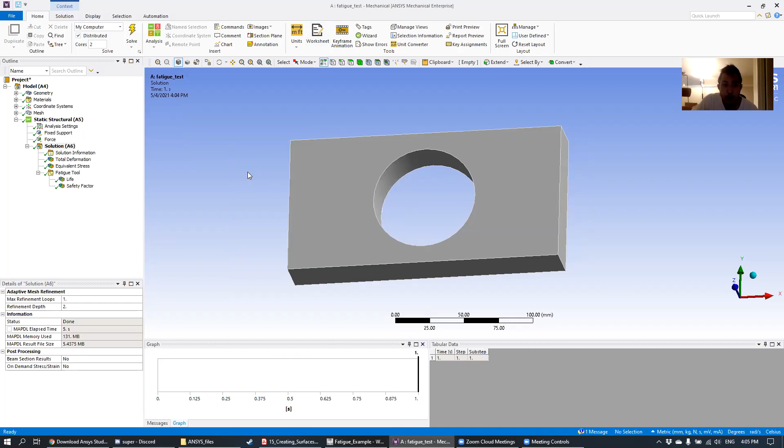To set up the fatigue analysis, we basically set up the same thing as a typical static structural analysis. The only thing we add is this fatigue tool. Just to remind you, we got this fatigue tool by right-clicking on Solution, A6 — that's typically where we'd insert things like total deformation, equivalent stress, and so on. But another thing you can insert here is this fatigue tool, and that'll give you information on how many loading cycles your part can withstand before it dies to fatigue.

I think last time we were looking at this screen right here. If you left-click fatigue tool, you'll be able to control how the loading goes and what kind of mean stress correction theory you can apply.

For the loading, you can switch it — the two main ones are fully reversed, where it'll apply your loads completely forward in one direction, then reverse it and apply the load in the other direction, cycling through that over and over again.

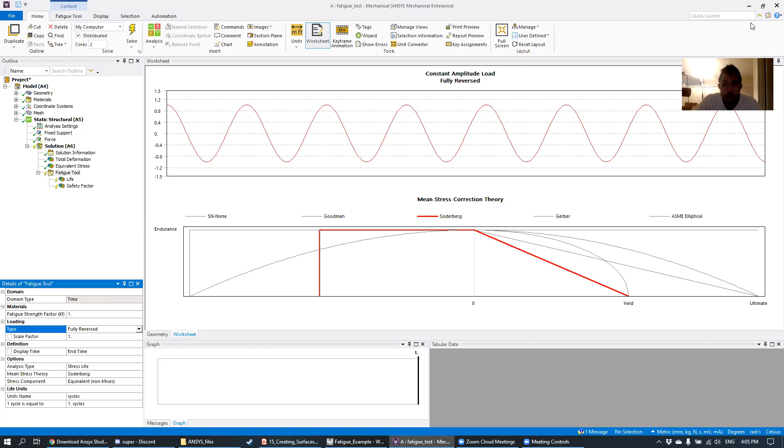Another way you can apply this is zero-based, where your load will go from full blast down to zero, then back up to full blast down to zero, oscillating up and down like that. Depending on the loading situation for your part, you can choose whichever one makes the most sense.

The other thing you have to select is a mean stress theory. Usually you'd want a mean stress theory that slopes downward like this — this one is the Soderberg theory. This tells you that the yield strength of the material will decrease over time.

Again, this isn't something I'm particularly familiar with, so I'm not going to pretend I know what these different models are. If you have a mean stress theory you've learned in another class, like strength of materials, definitely apply that here. It's been a long time since I've taken that class, so I'm just choosing the one recommended to me from reading some stuff online and the documentation — you guys are probably a lot more knowledgeable than me on this.

After you pick the loading style and the mean stress theory, you can go ahead and run the results to get these two main results here. Let me go ahead and solve this one more time.

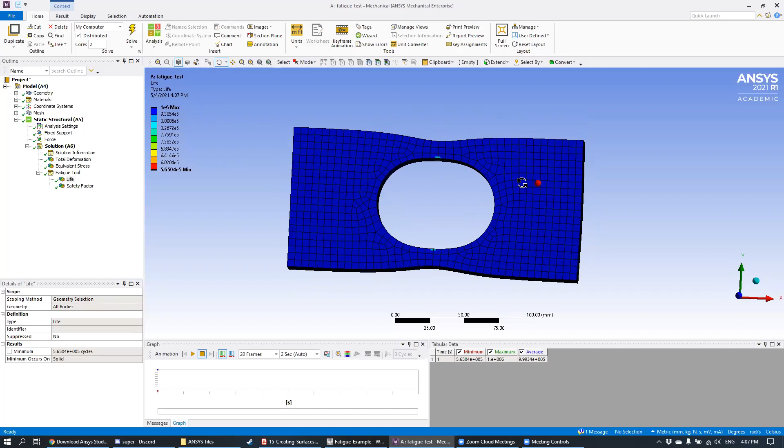Okay, so the first result we can look at here is called life. Life tells you how many loading cycles your part can withstand before it starts to become in danger of fatigue failure. What you'd like to see is most of your part be a blue color, because blue is typically a good color in Ansys — it tells you it's either low stress or it can take a lot of punishment.

For the majority of this part, we have the maximum allowable loading cycles, which is 1,000,000. We're limited to 1,000,000 because that's the maximum of the SN curve we saw last time — I think this material is structural steel, and for structural steel we only have data up to 1,000,000 loading cycles. This isn't saying the part will fail after 1,000,000 cycles, just that it should last at least that long. If you want to see how many more cycles it can withstand, you'd need to input more data into the material properties, like we showed last time.

But let's look at the other end of the spectrum. In red, you can see a value of about 565,040. Those are occurring at these apexes here on the hole. This tells you that after you reach about 565,000 cycles, those parts of your model will be in danger of fatigue failure. So if you repeat this loading forward and back 565,000 times, your part is going to fail first over here, highlighted in red, yellow and green.

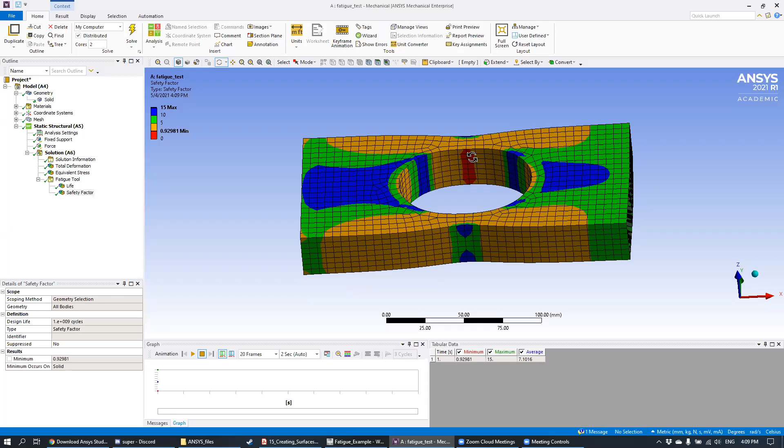Another thing you can find here is the safety factor. The safety factor is a measure of how well this part will hold up as a function of time. You can see the minimum here is 0.92981, which tells you Ansys thinks the safety factor for these red areas is really low, because they're going to fatigue and break at a relatively fast time compared to the other parts.

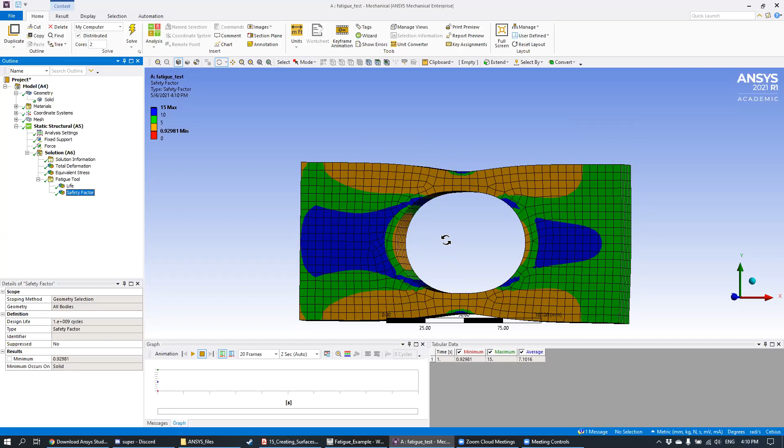Even though the other parts of the plate didn't fail, at least not in the life calculation, Ansys is giving you other areas you should maybe be concerned about in case of future fatigue failure. The maximum safety factor here is blue, and those blue areas are good. But in the areas that are orange, green, or red, those are relatively dangerous areas where you might want to think about redesigning to make it stronger.

So this was an overview of the fatigue life tools within Ansys. Remember, these are only an approximation — it's not like Ansys is actually simulating 1,000,000 cycles of loading. It's using finite elements as well as some theory about fatigue to produce these approximations. In real life, your results may be a little different than this. So don't treat this fatigue tool as gospel, and don't say you know for sure this part is going to last for exactly 565,040 cycles before it breaks.

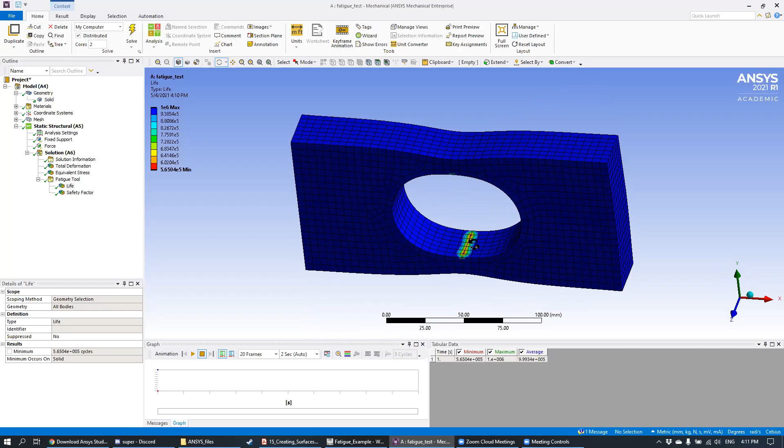Think of this tool more as a guideline to help you say, okay, I can see that this area of my model is more vulnerable than the others, so let me try to beef up this design to make it a bit better. Because it's such an approximation, I'd take these results as just a guideline to help you design your part better, but nothing too exact — there's nothing super exact about this.

Okay, so any questions on this fatigue tool before we move on?

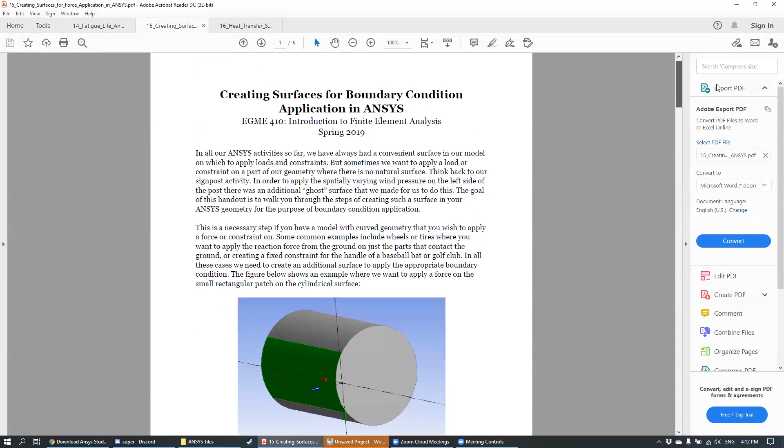This is a handout that's been posted onto Canvas, so it's available for you guys to look at. What I mean by this example is we want to create situations that look like this.

Because normally, if you have a cylindrical part like this and you try to select the surface of that part, you're going to select the entire exterior surface of the cylinder.

Which is fine for a lot of cases, but there might be some instances where you only want to apply a boundary condition on just a small area of whatever part you have.

I chose a cylinder here because this is the most common place where you would want to use this, because if you have some kind of rounded geometry and you want to apply a boundary condition on just a small part of it, right now you're not able to do that within Ansys, because if you try to select the surface, it would select the whole thing.

One example that uses this is, let's say that you have some kind of wheeled object. I know several of you are doing skateboards or longboards, or some of you are doing cars or trucks or things like that.

If you wanted to apply a boundary condition on the bottom of the wheel, right now you're not able to do it, because if you try to select the cylindrical wheel, you just select the whole thing.

But what would be more realistic is if you could only select just a small portion of it, so you can say this is the area where my object is resting on the ground, and that's where I want to apply my boundary condition.

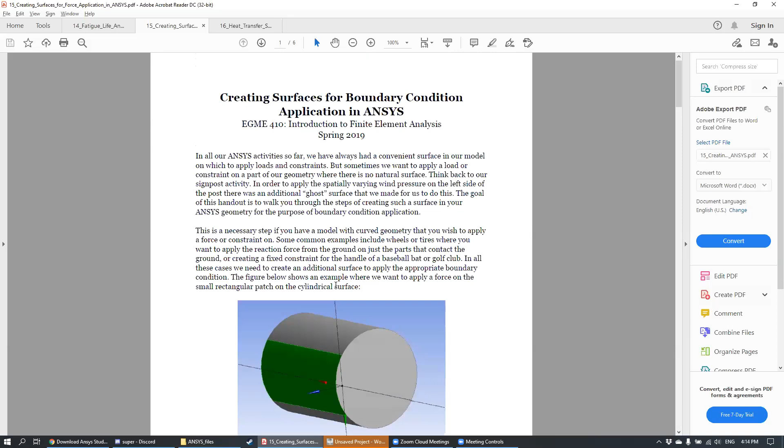The purpose of this demonstration is to show you how to create these extra surfaces for the express purpose of boundary condition specification.

Let me go ahead and create the geometry for this. The tool we're going to use is Design Modeler, which is the first CAD software we learned in Ansys. Let me go ahead and boot this up. The tool we're going to use inside Design Modeler for this is called Projection.

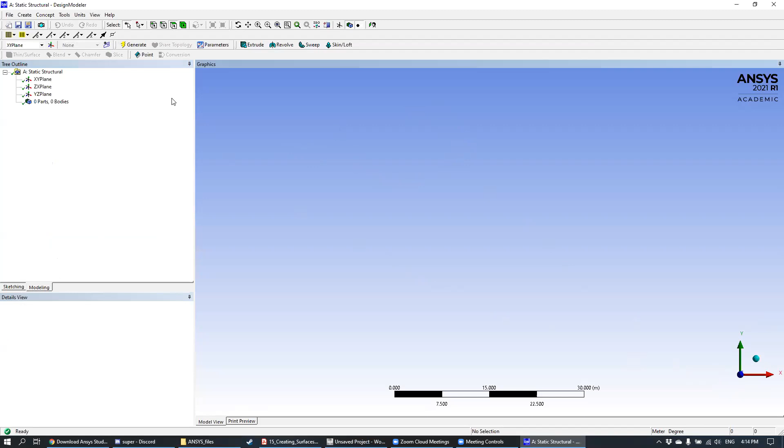The first thing we're going to do is create our initial geometry. I'm just going to create a simple cylinder here. Let me go ahead and draw a circle here, and let me go ahead and dimension this guy.

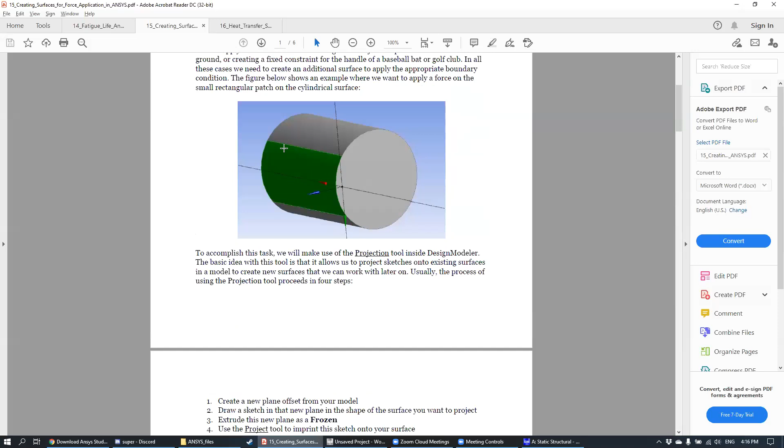And so what we need to do is project another sketch onto the cylinder in order to create this extra surface. And so we're going to use several different new tools here in Design Modeler.

The first of which is we need to create a new sketching plane, because right now the only sketching planes available to us are the three Cartesian planes: the XY plane, the YZ plane, and the ZX plane.

I want to create a plane that's offset from this, bringing the plane off to the side here. To create that, let's go to Create. From this create tool, you can do a lot of CAD-specific software stuff, but in this case, we're going to click on New Plane. You can see we've created this new plane called Plane 4.

And then we're going to modify this. The first thing we're going to select here is the base plane, which is basically going to be the plane that it's going to be parallel to. In this case we have two options.

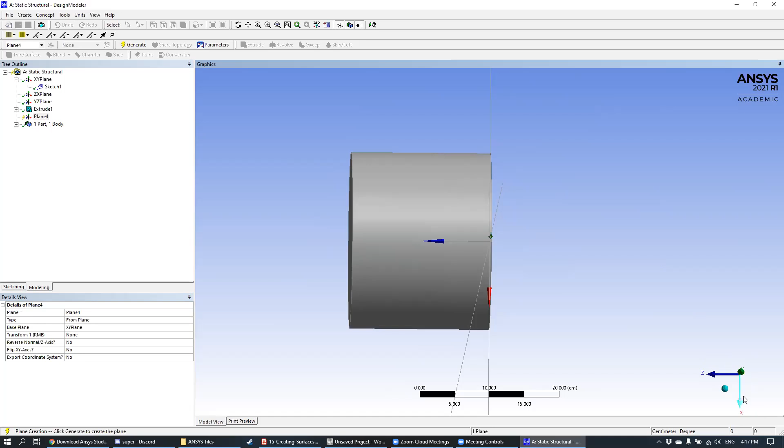We can either pick the XZ plane, which is kind of in plane with the side of the cylinder, or the other option is the YZ plane, which is just this one right here. Because we have a cylindrical object, we can choose either one of those and they'll both work. The only one we can't choose is the XY plane.

Because if we're looking down the XY plane, that's going to be the ends of the cylinder, and we want a plane that's on the side so we can project a surface onto the side of that cylinder. So for this example, let me pick the...

YZ plane. So to select a base plane, you can click on base plane here, click on another plane here from the tree outline, and then go ahead and hit apply.

And then from here we want to do an offset. For the offset here you have to be a little bit careful, because we want to offset this plane in this direction, since our plane right now is currently in the YZ plane, and we want to bring that plane basically out of the page so it's offset from our cylinder.

Right now, if you look at the coordinate axes for this particular plane, you can see that the axis that brings it out is going to be the blue one, which is the z-axis. You have to be careful here because this z-axis is not the same as the global z-axis — it's local to the plane we just created. So when offsetting your planes, make sure you look at the coordinate axes for your new plane, not the global axis.

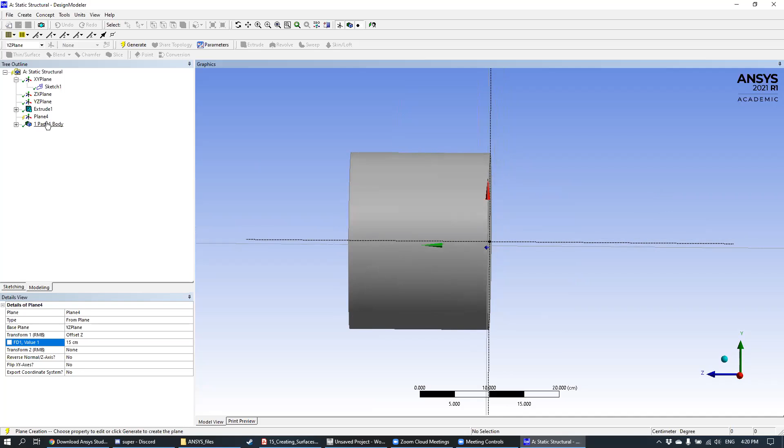So let's go ahead, we have the lightning bolt here, so let's click generate. By clicking generate we can see that our plane here is activated. So let's go ahead and create a new sketch in this plane.

In order to create a sketch in this plane, make sure you have Plane 4 selected, that's the new plane we just created, and let's go ahead and click sketch.

And let's go ahead and just make a simple rectangle, okay? Let me center this. Oops, rectangle, okay? And let me make a rectangle that's just like this, okay?

All right, let me just go ahead and dimension this rectangle here just to make it good. So the length, let's make it the same length as our cylinder. And let's have the height of this be 10 centimeters. And then let's set the distance in between these two to be 5, just so it's nice and center.

All right, and so if I rotate here, you can see that I have this plane right here, or this sketch right here. And what we're going to do basically is we're going to project this sketch directly onto our cylinder here to almost act like a stamp or like a tattoo.

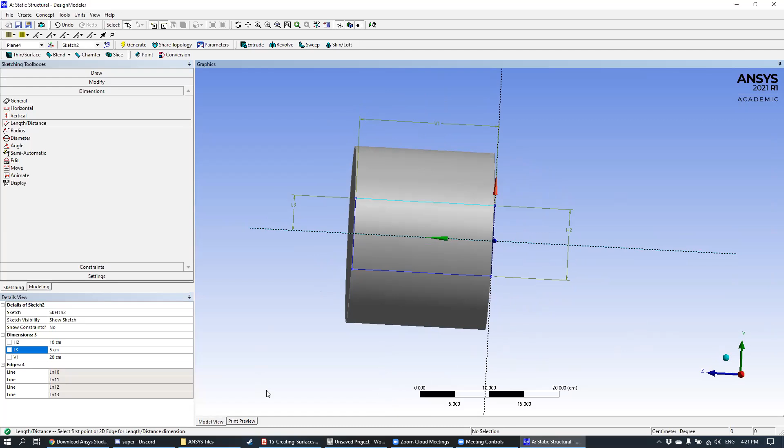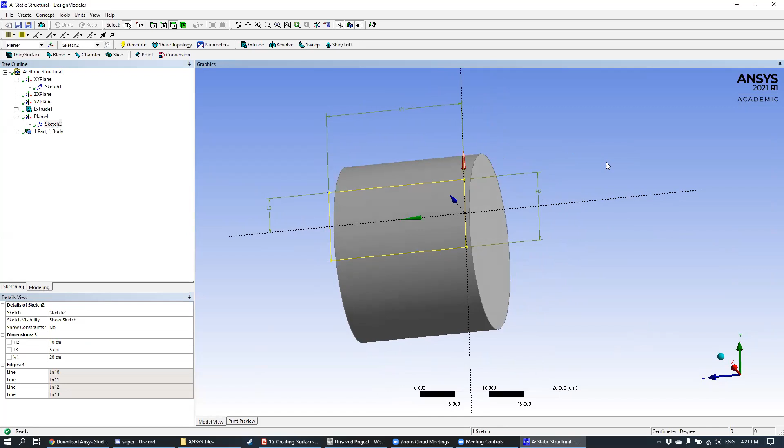Okay, so the next thing we have to do here is we have to freeze this sketch. Let me go back and go to the modeling portion here, and highlight the sketch here. So the next step we have to do is freeze it. What that basically means is we're going to be indicating to Design Modeler that we've created the sketch here, but it's actually not going to be part of our model. So we don't want to create any new volume with this, we don't want to create any new geometry, because we're just using this strictly for projection purposes. So we need to freeze this sketch in order to do that.

And you can do this a number of different ways, but the way that I learned to do this is to use the extrude tool. So basically the same tool that I used earlier to produce this cylinder, but now we're going to use it to freeze this sketch. After you click extrude, go ahead and highlight your sketch here and hit apply. And so that's going to set sketch 2 to be kind of the active mode here for this extrusion.

And then what we're going to do here is we're going to change this operation, because normally the normal extrude operation is you add material to your geometry, which is what we did in the first step before, okay? But now what we're going to do is we're going to just freeze it. So under operation here in the details view in the bottom left, what you're going to do is you're going to change this to add frozen, okay?

So by changing this to add frozen right here, then that's going to freeze the sketch and let Ansys know that we don't actually want this to be part of our geometry. We're just using it for projection purposes. And so the depth here doesn't really matter because we're just freezing it. So after you click add frozen, go ahead and click generate.

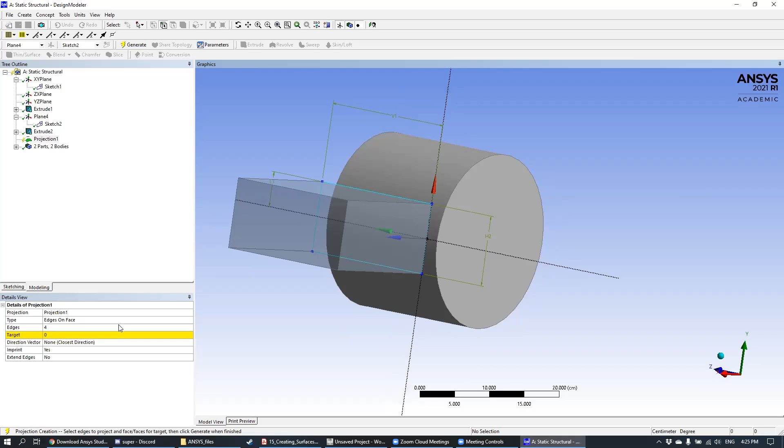And so for the target, we're going to select the surface that we want to apply this projection on, which in this case is the side of the cylinder. We've gone ahead and selected the side of the cylinder here for the target.

Once we're done with that, we can go ahead and hit generate. After we generate, it's a little bit hard to see, but you can see that our side of the cylinder here was segmented into two sections. We have the part where we projected onto it - this rectangle here is the projection of the sketch onto the cylinder - and then we have everything else.

Now that we have this projected surface here, we can actually use this in our simulation and apply a boundary condition onto it. Any questions on this so far before I show you how to use this in Ansys Mechanical?

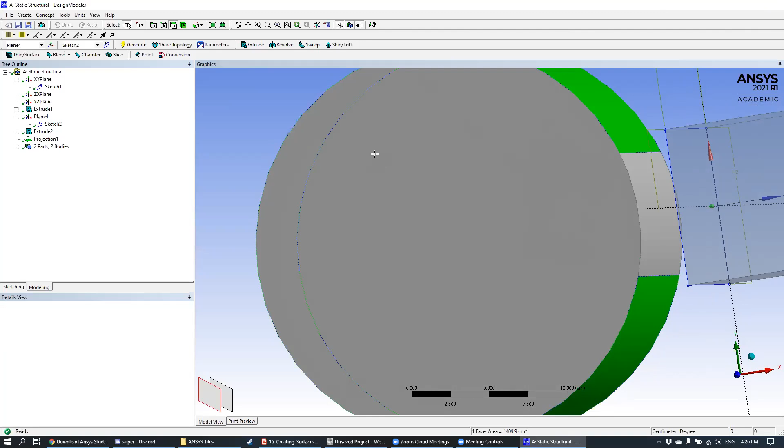Let me go ahead and close this out, and let me go ahead and start launching Ansys Mechanical.

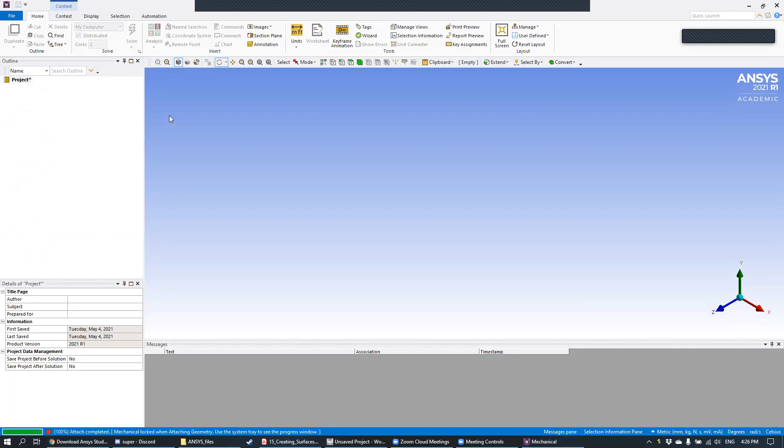So for those of you who have final projects where you have an awkward surface, or something you want to apply a boundary condition on but don't want to select the entire surface, this is how you would do that. You need to load your CAD geometry into Design Modeler, create a projection, and then use that projection to apply your boundary conditions. I know a lot of you are doing wheeled objects, and this would be great for that.

So for right now, we have our object in here. Let me go ahead and suppress this, because we don't want that frozen part, right? So now all we're left with is just this geometry here with this projected surface. Let me go ahead and mesh this, just a very basic mesh first.

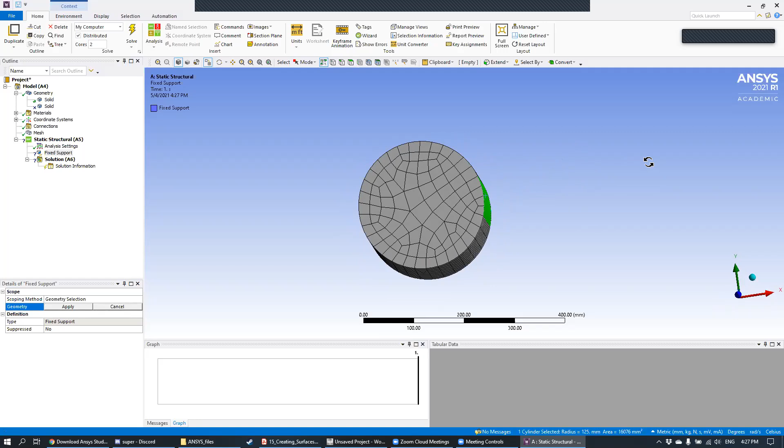Now let's apply the boundary conditions. Let's do a pretty common case where this here represents the wheel of some kind of wheeled object, maybe a skateboard or a car. We want to designate that the wheel is resting on the ground. To indicate that, you can apply a fixed support boundary condition on just a small portion of the wheel, just like this. I've gone ahead and applied a fixed support onto just the small patch we made earlier.

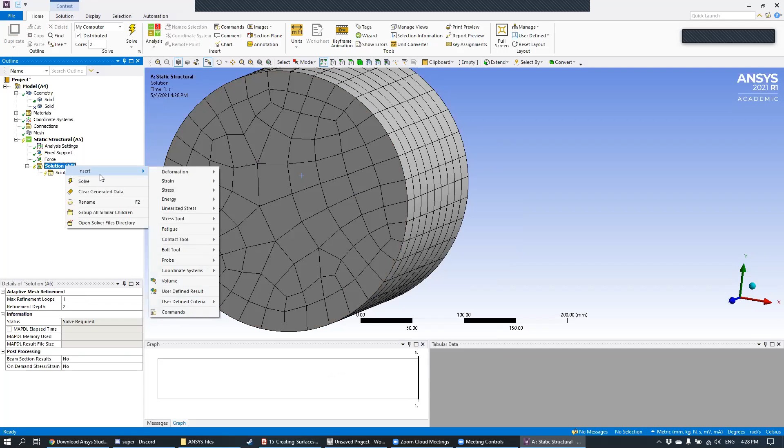Let me go ahead and apply a force on this surface right here, let's say 5,000 newtons. And then let's look at the total deformation - oops, not directional - so let's do deformation total.

Let me just go ahead and solve this so you can see what the results look like.

Now we're looking at the total deformation field of this part. You can see here in the small patch that we defined earlier, the deformation is 0 because we applied a fixed support, and the displacement everywhere else is non-zero.

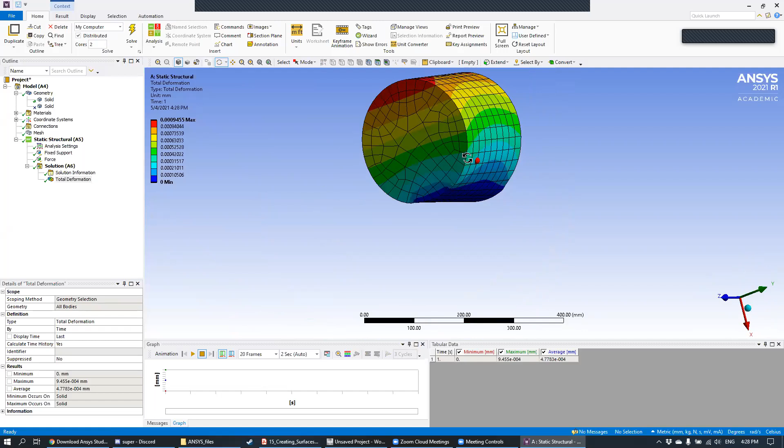This is a simple technique you can use if you have an awkward surface in your CAD geometry and want to apply a boundary condition on just a small portion of that surface. This is useful - using this, you'll be able to apply your loads and constraints much more precisely, rather than being limited to just the surfaces naturally created by your CAD geometry.

So any questions on this before we move on to thermal simulations in Ansys?

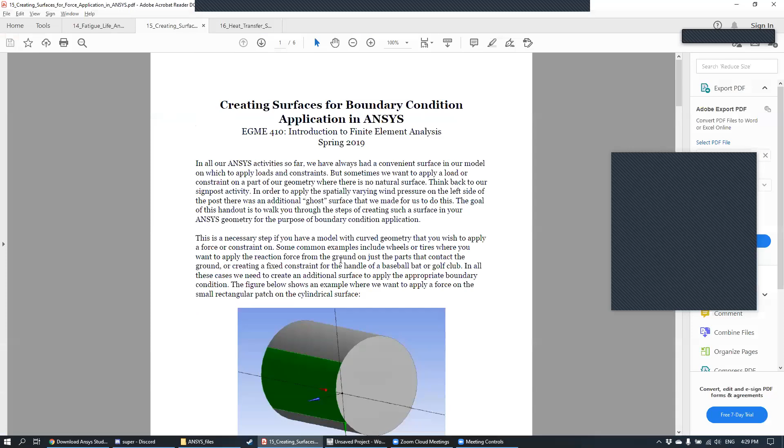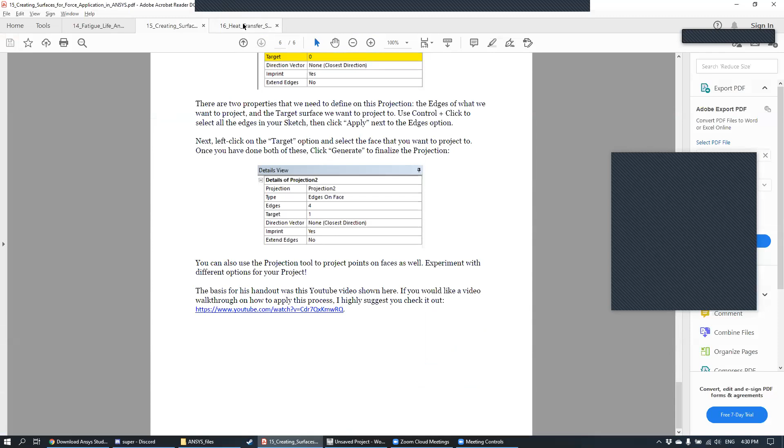Now let's get into thermal simulations in Ansys. This is a little bit different, because up until this point in the class, we've mostly just been focusing on structural finite elements.

Especially in the Ansys portion. But just like we talked about before, Ansys can do a lot more than just structural simulations. If you look at the toolbox available to you in Ansys, there's a ton of different stuff you can do. I'm going to do my best to cover as much as I can, but we're only barely scratching the surface of what Ansys can do.

One big part I wanted to go over was how to do a thermal simulation, so that you can do heat transfer for your projects or anything else you want to do. I know a few of you are doing thermal simulations for your final projects, so hopefully this will be helpful as you formulate that.

But before I do that, I want to go over some quick theory, so let me go ahead and stop sharing here. Let me go ahead and bring up my iPad.

In order to properly understand the thermal simulations within Ansys, I think we need to review a little bit of heat transfer along the way too. If you've taken 407 before, hopefully a lot of this is just going to be a refresher. But if you haven't taken 407, or you're taking it right now, maybe this will help you review for your final or help you teach it.

So we're going to do just a very quick Spark Notes, just a really quick summary of heat transfer.

In order to really understand all the settings and boundary conditions in Ansys for heat transfer, for thermal simulations, you have to understand a little bit of heat transfer. Let me start with a general statement of all of heat transfer, just to build your intuition for things.

For structural simulations, we have a general idea of what tends to happen, because we know that if you take an object and apply a force to it, it's going to bend, it's going to deform. So applying a load will cause an object to deform. Maybe you haven't thought about it like that, but that background intuition is working with you whenever you're doing a structural simulation, to help you do a sanity check on the results, because we talked about how important those things are.

So for heat transfer, the one sentence summary I want you to keep in your head all the time is that heat will flow from hot stuff to cold stuff.

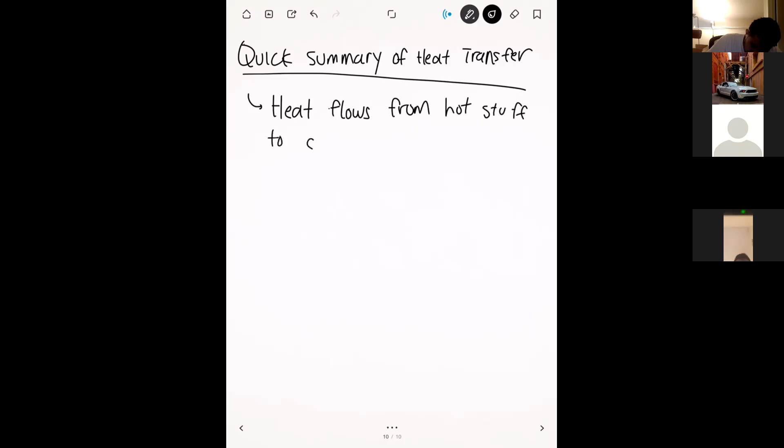I joke with my 407 classes all the time that I say this on the first day of class: all right, that's heat transfer, that's it, that's all you need to understand. Because if you understand that heat goes from hot things to cold things, that's the underpinning principle for all of heat transfer.

But of course, in order to really understand heat transfer, it's not enough just to say that heat goes from one place to another place. We have to quantify how much heat is going from one place to another, and Ansys is a tool that can help you with that. But as long as you understand this intuition, it's going to help you a lot when you're interpreting your finite element simulations.

So with thermal simulations, let me draw some connections between what we understand from structural finite elements to thermal. First, I'm going to talk about the idea of constraints.

So for structural FEA, when we talk about constraints, what we mean are boundary conditions that specify the displacement.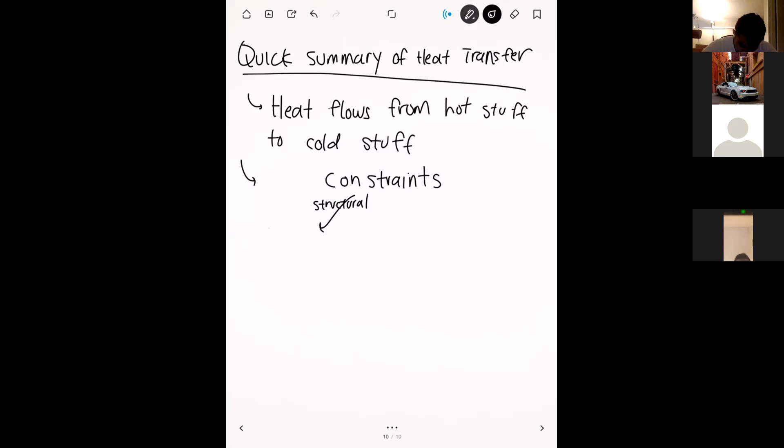Okay, so when we talk about constraints, we know to think about things like fixed constraints, right? So fixed constraints are when we say that the deformation or the displacement at a certain area is going to be 0, right? Okay, so we talk about constraints and structural, we're talking about displacements.

When we talk about thermal constraints, we're not really talking about displacement here. What we're actually talking about are going to be temperature. So when you say you're applying a thermal constraint onto an object, what you're really doing is specifying the temperature at a certain location. This is kind of the same thing as applying a boundary condition on the displacements. We've seen this already when we went over strong form, weak forms, and finite element forms, right? When we were applying our essential or Dirichlet boundary conditions for heat transfer, it was always on the temperature. So that idea translates to thermal by specifying the temperature.

All right, so now let's talk about loads. For structural loads, we're almost always talking about some kind of force or maybe some kind of pressure. Anything that has units of like newtons, or newtons per meter squared, pascals, things like that. Because we know that these are kind of the driving forces that's going to make our parts deform.

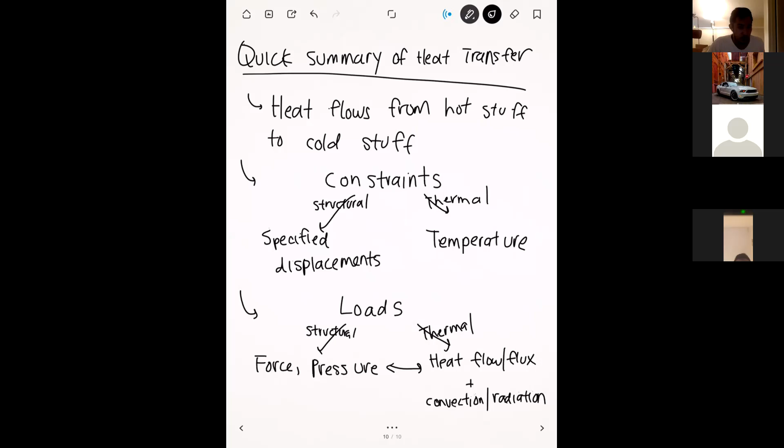Okay, so if you want to solve a thermal simulation, basically the equation that you're solving for is the heat equation. The heat equation looks something like this: partial t, partial squared t, partial x squared, plus partial squared t, partial y squared, plus partial squared t, partial z squared. This is the most general form in 3 dimensions, plus q dot, which is a thermal generation term, and f, which has all of our external loads. You don't really need to know this, it's just for trivia in case you're wondering what equation Ansys is solving for underneath the hood.

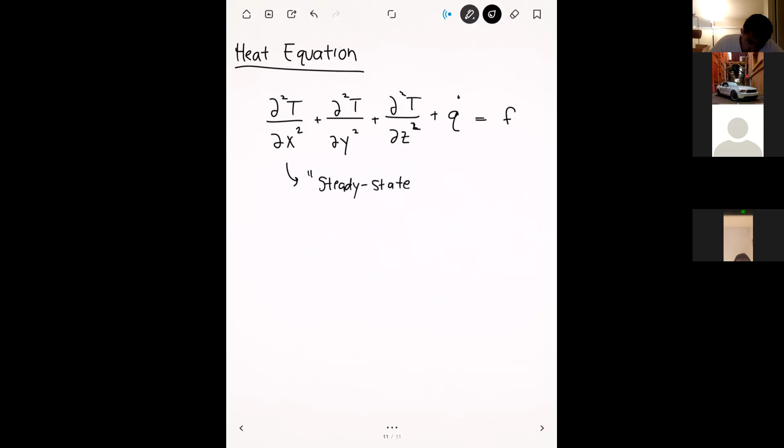And so in order to select this within Ansys, the type of analysis that you need to do is called steady state thermal. If you select steady state thermal from the Ansys toolbox, then that's essentially what you're going to solve. All right, and so now let's talk about the next few steps in the FEA process, which is geometry, connections, materials, and meshing.

All right, and so for these parts, nothing really changes as part of your finite element process. You're going to follow basically the same procedures that you've done before. So if you have a CAD geometry, you would import that into Ansys, select its correct materials, apply its connections, and then do your meshing. But two things I want you to be careful of in this section: first is the materials. One thing you need to check is that your material, whatever you select, has all the thermal properties available to it.

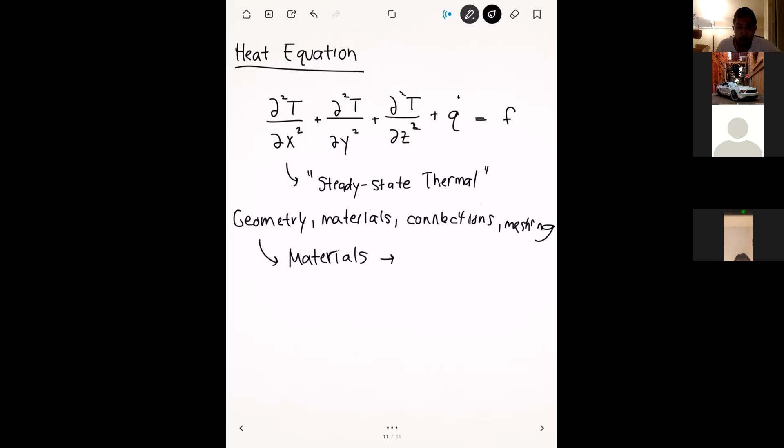The one property you really need to have is called thermal conductivity. The units for thermal conductivity are typically watts per meter degrees Celsius. If you're using a built-in material in Ansys, it should have this stuff, but it always pays to check just to make sure. And just like Young's modulus, your thermal conductivity can be anisotropic, but for now I'm just going to assume it's an isotropic material.

The next thing I want to talk about is the meshing. For meshing, there's really not much that's different here. The only difference is that you can use linear elements. The reason for that is linear finite elements don't have any risk of shear locking in thermal simulations, so linear finite elements are okay. That should save you a little bit of cost, because your elements will have fewer nodes, and you can mesh it a little bit tighter than before. But besides those two differences, nothing really changes from our usual FEA process.

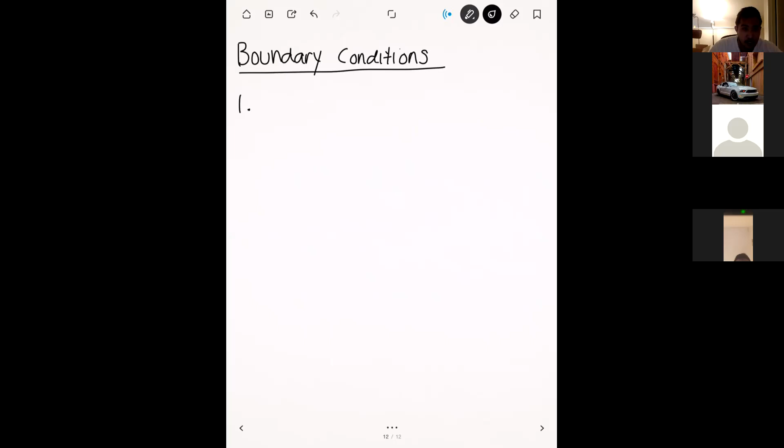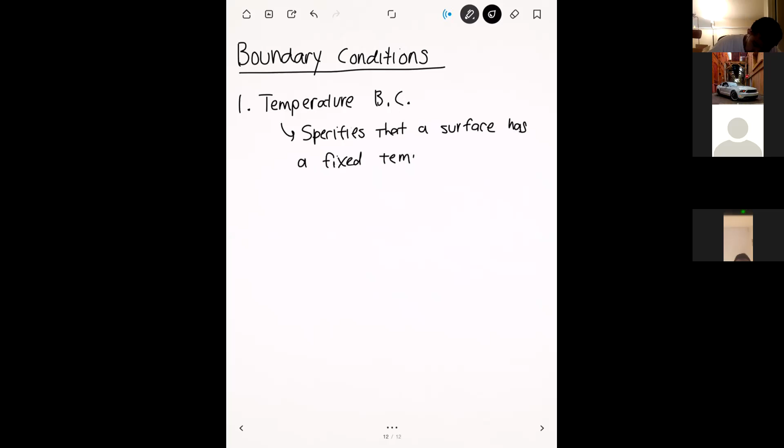This is the simplest boundary condition you can specify. It's also great if you know the temperature at a certain location in your model, because what this does is specify that a surface has a fixed temperature. It's the same thing as a constraint—you're basically forcing an entire surface to have a certain temperature. This is usually good, and if you know this, then that's great. But sometimes this can be a little bit hard to do, especially for some complex geometries.

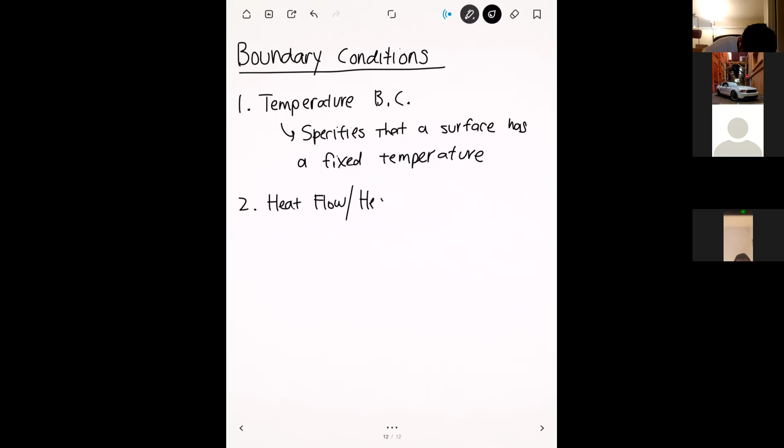The next type of boundary condition you can apply is a heat flow or heat flux boundary condition. This specifies basically the amount of energy or power that's crossing over a surface in your system. This is nice because a lot of times it's relatively easier to think about thermal situations in terms of energy.

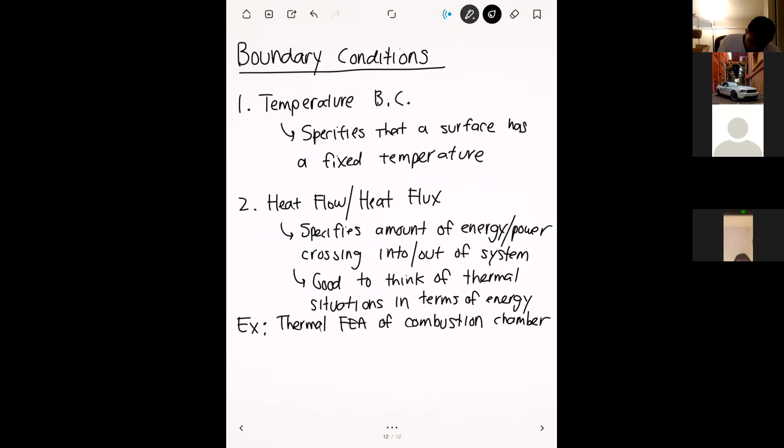I'll give you one example of this. Let's say you're going to do a thermal finite element simulation of a combustion chamber. I'm going to draw a very crude picture of one—my combustion chamber is shaped like a potato for some reason. Inside this combustion chamber, you have a controlled combustion reaction that takes place, which looks like an explosion. And then what we want to find out through FEA is how the temperature in our combustion chamber walls is being affected by the combustion reaction.

Oh, question? Is that a caribou? It could be. It could be an angry caribou.

Okay, so let's say you're going to go about solving a finite element analysis of this, and you want to do an FEA of the combustion chamber walls. In order to run your FEA, you have to apply boundary conditions on your chamber. One surface that's going to be key in your analysis is: what boundary condition do you apply for this inner surface? You can try to supply a temperature boundary condition and say that the temperature on this inner surface is going to be something. But that's going to be really hard, because to really get that, you either need a very strong knowledge of this combustion reaction and how hot it burns and how that transfers to the walls, or you need some kind of thermometer inside the combustion chamber to measure those things. Neither of those is very practical or particularly easy. Another way to approach this problem is to say: inside this combustion chamber, I have this combustion reaction going on, and based on the amount of fuel and oxygen and stuff I'm putting in there, I know how much energy this reaction is going to release.

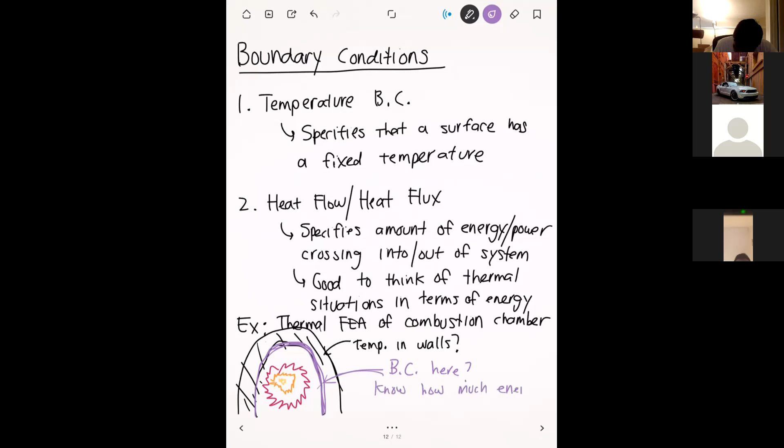That's something that's relatively easier to compute than trying to figure out how hot the combustion reaction is going to be, especially because the combustion happens so quickly. It's hard to say what the temperature is going to do as a function of time, and in a lot of sense that's probably what you want to be simulating for. But computing the amount of energy, that's easier to do, because a lot of times these systems are very tightly controlled in the amount of fuel and the amount of oxygen that's used.

So what you can do for a boundary condition is take that energy and use it to apply a heat flow or heat flux boundary condition on the inside of your chamber. That would be an easier and probably more accurate way to simulate this rather than trying to guess the temperature on the inside of this chamber.

The heat flux boundary condition, I think people tend to shy away from it a little bit because it's a little bit more nebulous. But if you think about it in terms of energy, and how much energy is going to be taking place here, how much energy is it going to absorb, the heat flow and heat flux boundary conditions become a lot more useful.

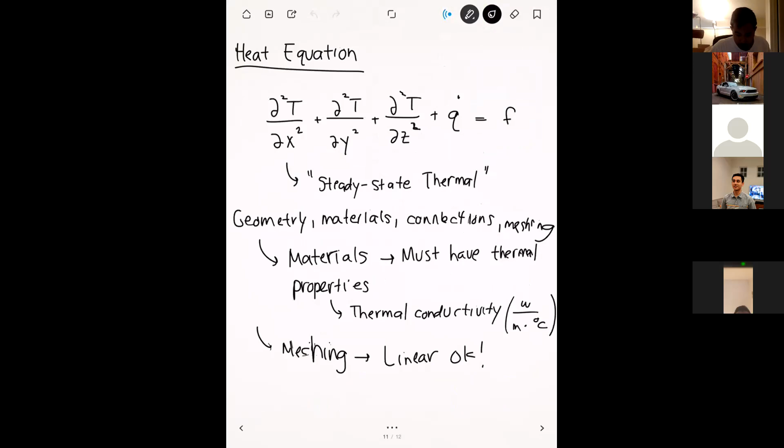Any questions on this? No questions here. Could I see the differential equation page again? Oh sure, yep. Thank you, perfect, yep.

All right, and so that's the heat flow, heat flux boundary condition. Now let me give you kind of a special case of the heat flow, heat flux, and it's so special that it actually has its own option within Ansys because it's used a lot. That option is known as the perfectly insulated boundary condition.

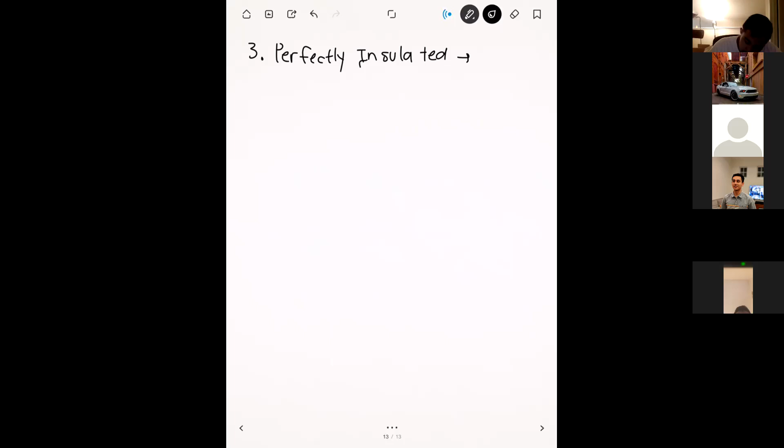The perfectly insulated boundary condition is a special case of heat flow, heat flux, which says that for a certain surface, if it's perfectly insulated, then no heat can pass through this surface.

This would be a really useful boundary condition if you know that there are certain surfaces in your model that aren't going to conduct any heat. One example is, let's say that you have a certain part of your model that's surrounded by styrofoam.

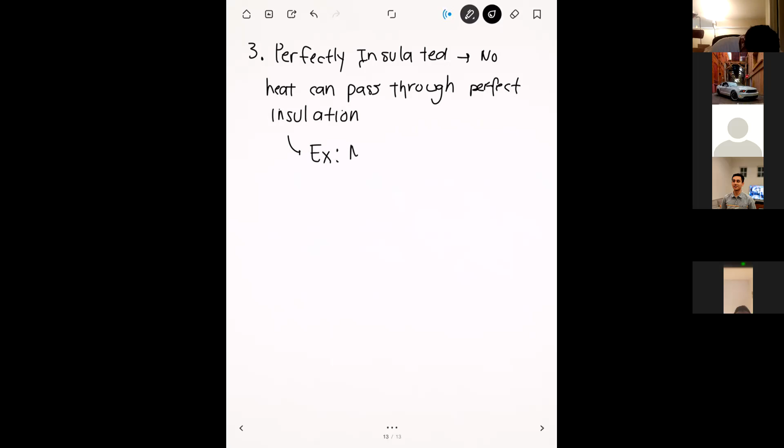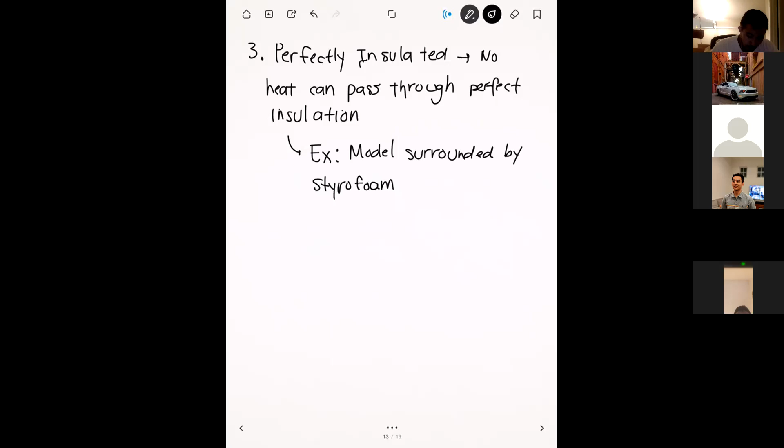One thing we know about styrofoam is that it's an excellent insulator, right? That's why they make coffee cups out of styrofoam, so you can pour hot coffee and your hands will not be burned. So if you have your model that's surrounded by styrofoam, then you know that it's going to act like a very good insulator. Perfect insulation means zero heat flux, zero heat transfer.

In reality, it's impossible to have a perfectly insulated boundary condition. I don't care how much money you paid for your hydro flask, that thing's not going to keep your water cold for all of eternity. All surfaces will leak heat to some degree, and a lot of materials and good design will limit this strongly, but it's really impossible to have a perfectly insulated boundary condition.

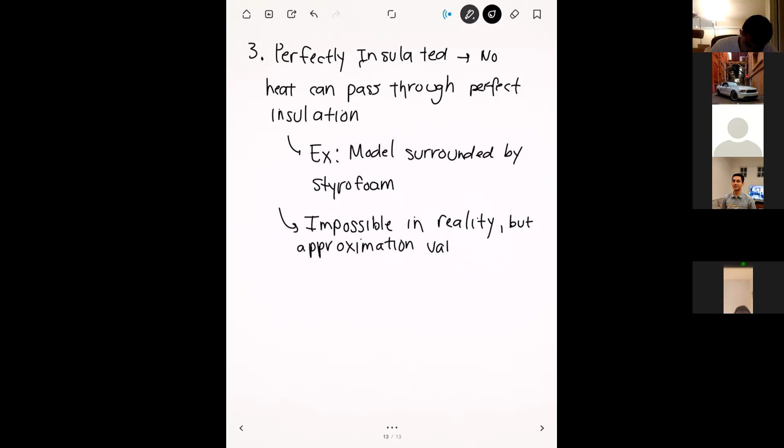For practical purposes, you apply a perfectly insulated boundary condition not because there's going to be absolutely no heat loss in reality. But it's a lot of times a very useful approximation, and one that's valid in most cases. So that's the perfectly insulated boundary condition, and it's used fairly often just because it's a nice approximation.

All right, now let's go over convection, probably one of the more important boundary conditions that you can use in Ansys. If you remember from 407, convection is heat transfer to some kind of moving fluid.

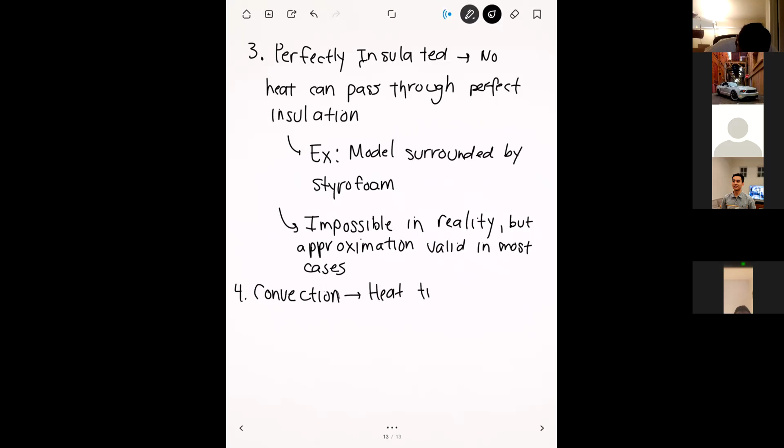This is often used in engineering if you have a part that's cooled by water or cooled by air. Let's say you're doing a finite element simulation of the inside of your gaming rig or some kind of computer, and all the chips and electronic parts in there are cooled by a fan. That heat transfer from the computer to the cooling air, that's convection.

Schematically, usually we illustrate it like this: we have some kind of surface, and the surface is at some kind of temperature, we'll call it TS. Then over the top of this, we have some kind of moving fluid. This moving fluid has two properties that we need to quantify: the property H, and the property T infinity. I'm going to define both of those on the next page. Because we have this moving fluid over the surface, we usually have some kind of heat transfer that comes out.

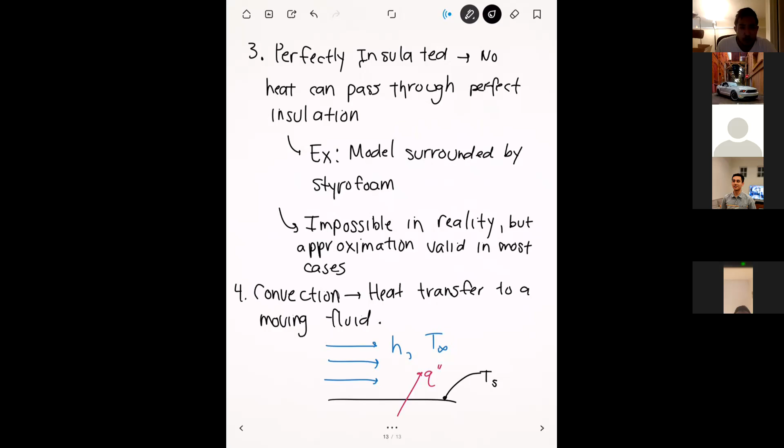Any questions on this so far? The equation that we use to govern convection heat transfer is known as Newton's law of cooling.

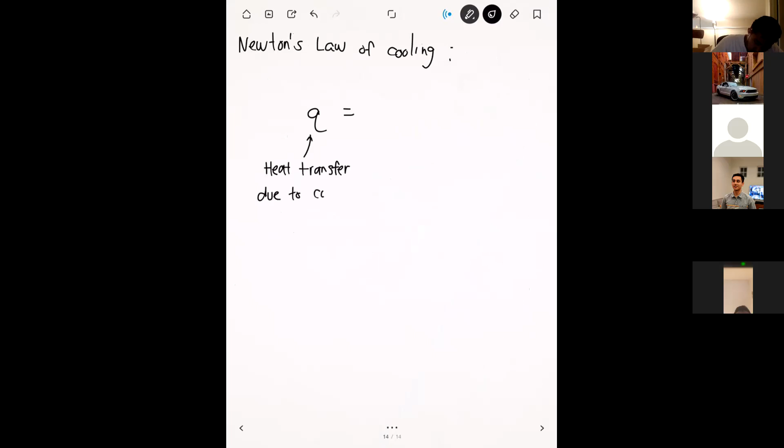And it says that the heat transfer due to convection is equal to H times A times the difference in temperature between the surface and the fluid temperature.

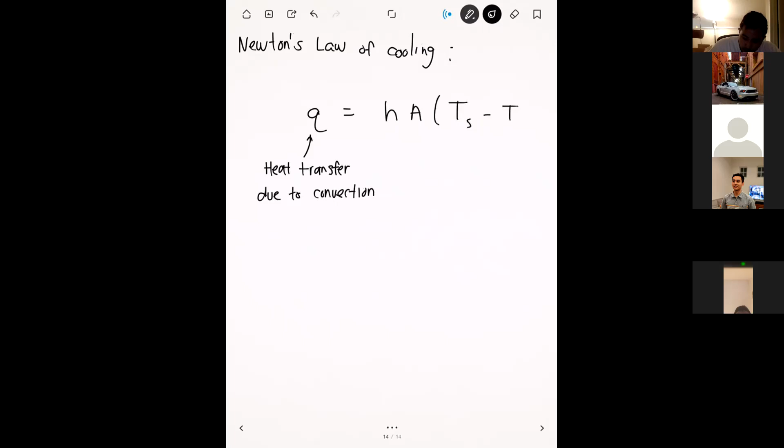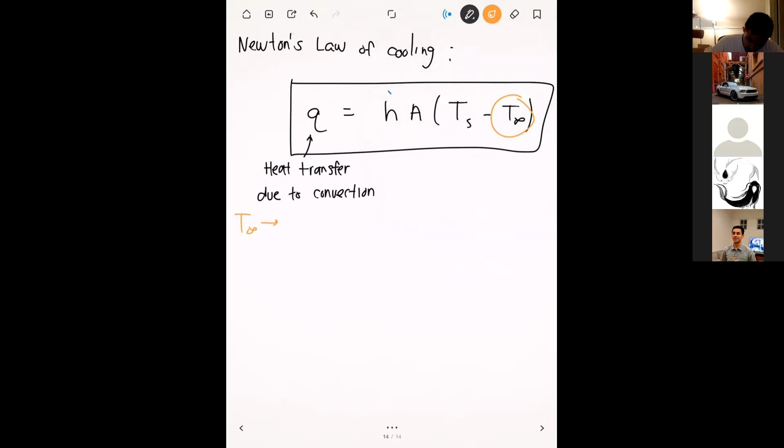All right, so let's go ahead and define all of these terms here. Let's start from the right and go left, because that makes things a little bit easier. So first we have T infinity. This is going to be the temperature of our fluid. Whatever temperature the fluid is at, this is what you need to specify. It's worth noting that this is a parameter that you have to apply in Ansys. If you apply a convection boundary condition within Ansys, you have to specify what the fluid temperature is. That's one of the essential quantities.

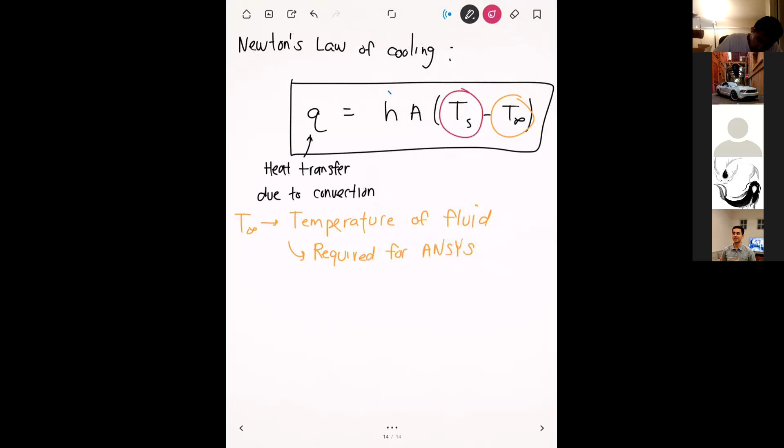Next we have TS, and TS is the surface temperature. The surface temperature is something that's going to be automatically computed from Ansys, so you don't have to worry about that. In fact, that's going to be one of your unknowns, because Ansys is going to compute the temperature all over your surface.

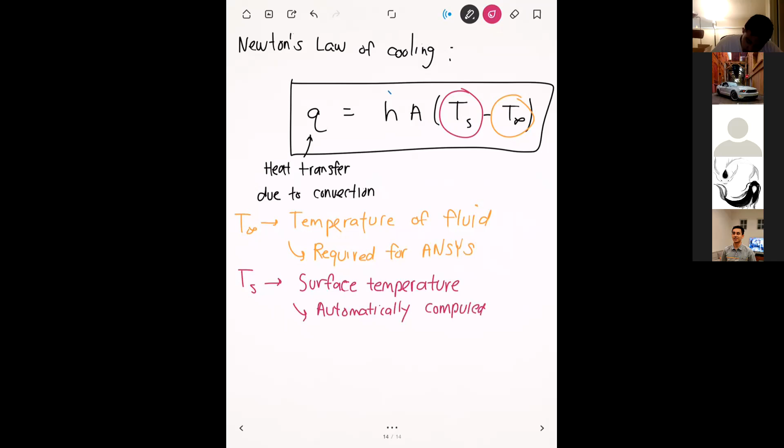Next we have A. I'm not going to write A down there because A is just the surface area. That's straightforward, so there's not much to say there.

And the last quantity we have here is H, mysterious H. H here is the convection coefficient. The convection coefficient is a parameter that you can set, and this is also required by Ansys. What the convection coefficient defines is how much or how strong the convection heat transfer is.

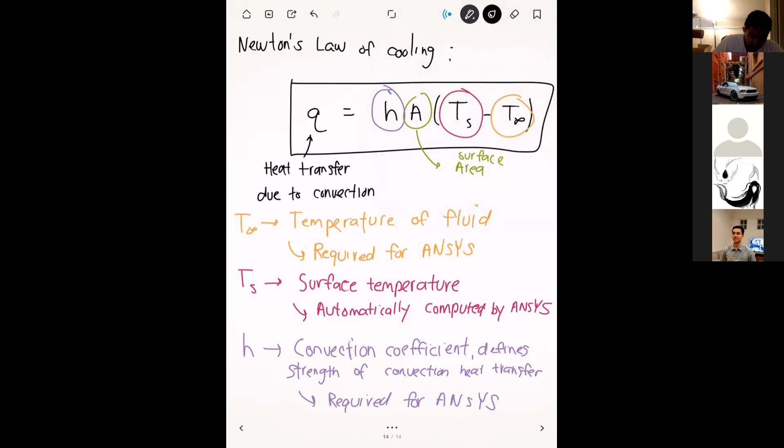And so this is required for Ansys, so this is something else that you have to specify. In total, when you're applying a convection boundary condition in Ansys, which more than likely you will be, unless you're doing something like a satellite, you need to specify the fluid temperature. That's one thing you have to specify. And you have to specify the convection coefficient as well. You'll see in the example later that we have to specify both of these.

So how do we select these? The fluid temperature, more or less, is fairly easy to determine, because that's usually not too hard to imagine. A lot of times, if your part is being cooled by room temperature air, you can just set the air temperature to be room temperature. The thing that's actually really difficult is this convection coefficient. In order to find good values for the convection coefficient, you're going to need to use some techniques from your heat transfer class.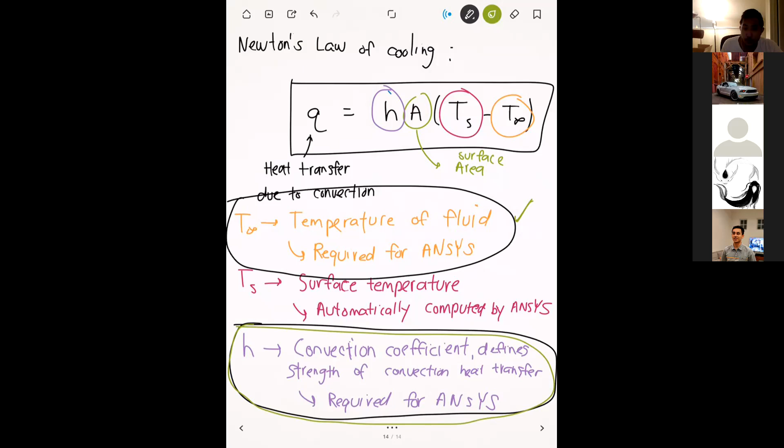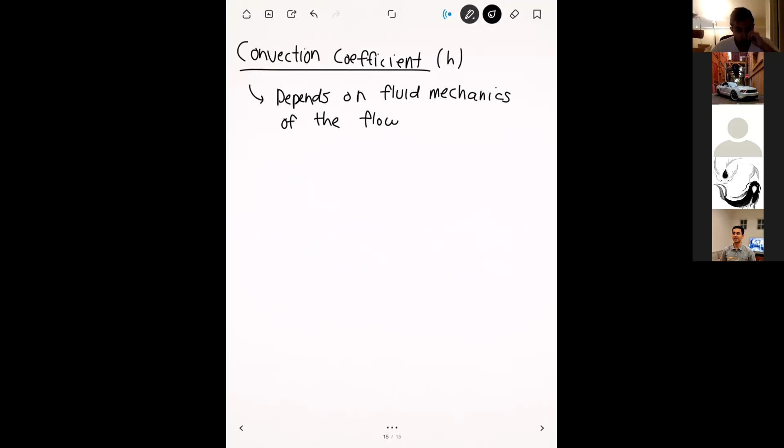Because in reality, the factors that go into this convection coefficient are very complex. A lot of it depends on the fluid mechanics of the flow. It depends on the fluid mechanics, it depends on the properties, it depends on the temperature. There's a lot of factors that go into this convection coefficient. The best way to estimate this is you can use your knowledge from EGME 407 or any other heat transfer class that you've taken before.

Or another way that you can do this is you can look up some published data. If you're lucky and you're doing an FEA on a situation that's pretty similar to someone else's, and they've published their convection coefficient, you can go ahead and use that, and that's usually perfectly fine. But more than likely, what you're going to have to do is determine the convection coefficient numerically or computationally.

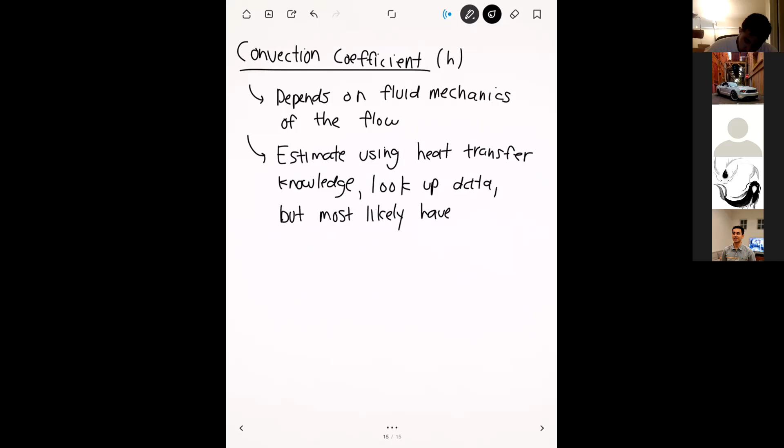So you're going to have to run a different simulation in order to compute this convection coefficient. This convection coefficient is by far I think the most difficult part of doing heat transfer simulations, especially ones that involve convection, because a lot of times your results are going to be very sensitive to this parameter.

So you really have to nail it in order to get your heat transfer simulations to be accurate. But getting it really accurate can be really difficult without the help of software. Unfortunately that's kind of where my knowledge ends, because I'm not as big an expert in heat transfer simulations.

But I do know that it's possible to do it with simulations. I just haven't done it in Ansys before, so it would be something I'd have to look up. It would probably involve the fluid mechanics solver, Fluent, in some way, because the convection coefficient depends on the flow, whether it's laminar or turbulent or things like that.

Convection coefficient is something you have to specify in Ansys, and you might have to be a little bit clever in how you come up with it. But your results probably will depend strongly on this convection coefficient, so just be aware. Any questions on this before we move on to radiation?

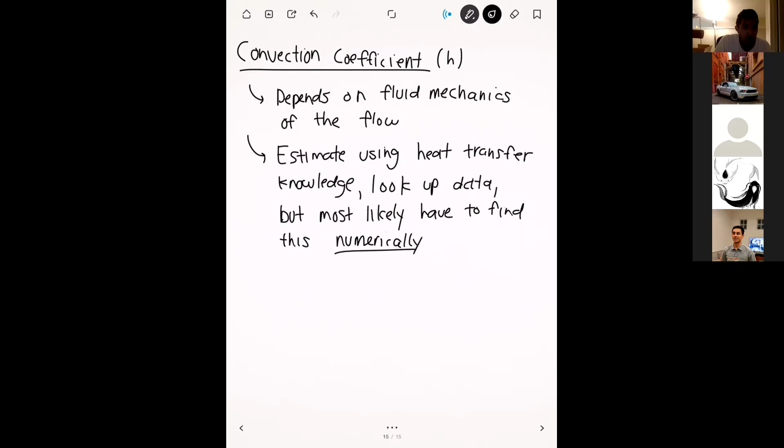All right, let's move on to the last mode of heat transfer that we have, which is radiation.

I'm not sure what your 407 classes are like, but for the one that I teach, radiation is a little bit of an afterthought. We kind of go over it and squeeze in as much as we can at the end of the class, but we don't really have enough time to give it a lot of detail. Because of that, my knowledge of heat transfer in general is not that strong, but radiation is even tinier than that.

So you have to look at kind of a microscope to see it. But for using radiation within Ansys, just a basic understanding of it is usually good enough. Radiation is kind of the black sheep of the heat transfer family, and it transfers heat in a way that's very different than conduction and convection. The way radiation does it is through electromagnetic waves.

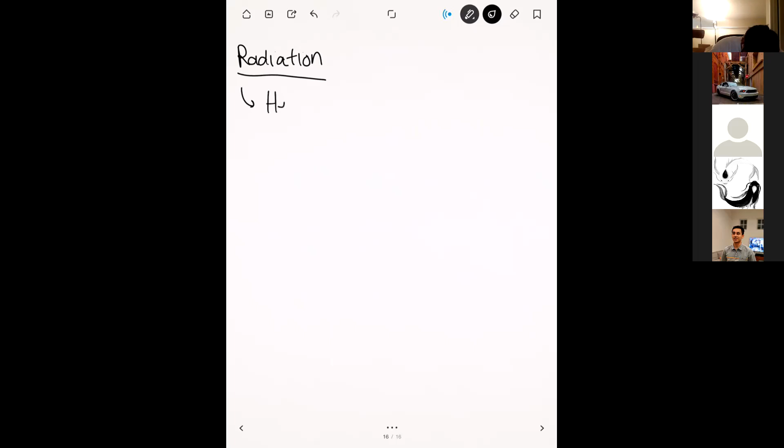This is significant because electromagnetic waves don't need any kind of material medium in between. So radiation can actually transfer heat in a vacuum, and in fact radiation actually works best in a vacuum.

I spelled vacuum wrong. Probably the most famous example of radiation is just walking outside, right? All the heat that the sun gives to the earth has to travel through space via radiation, because there's no matter and no particles in between the earth and the sun. So the only way for the heat from the sun to reach the earth is through radiation.

But the sun isn't the only object that can give off radiation. In fact, every object, no matter what temperature it is, as long as it's not at absolute zero, will give off radiation.

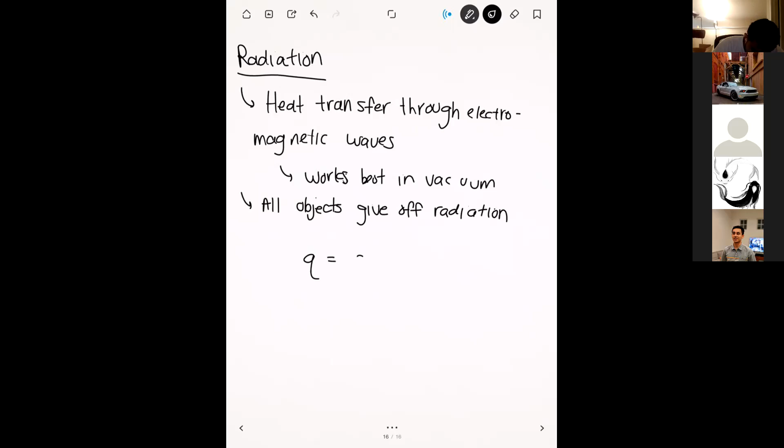The amount of heat transfer from radiation is given by the following formula: Q is equal to epsilon sigma times Ts to the fourth minus T infinity to the fourth.

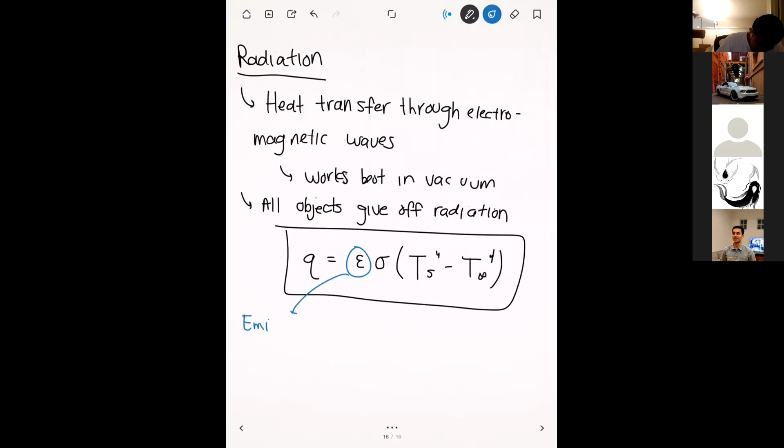Let me go ahead and define all of these parameters here. Epsilon here is the emissivity, a property of the surface. This defines how well that surface is at giving off radiation.

It can be something between 0 and 1, and 1 is the best value that emissivity can be, telling you the object is a perfect emitter. But an emissivity of 1 is kind of a theoretical, unachievable thing, because the only objects that have an emissivity of 1 are known as black bodies. We've gotten close to approximating a black body, but I don't think there's a perfect one out there in existence.

Whereas if you think of something like sandpaper, that's a very rough, coarse surface that probably won't emit that much radiation because its surface is pretty rough. But you can look up the emissivity in material data sheets for certain kinds of materials. Sigma here is known as the Stefan-Boltzmann constant.

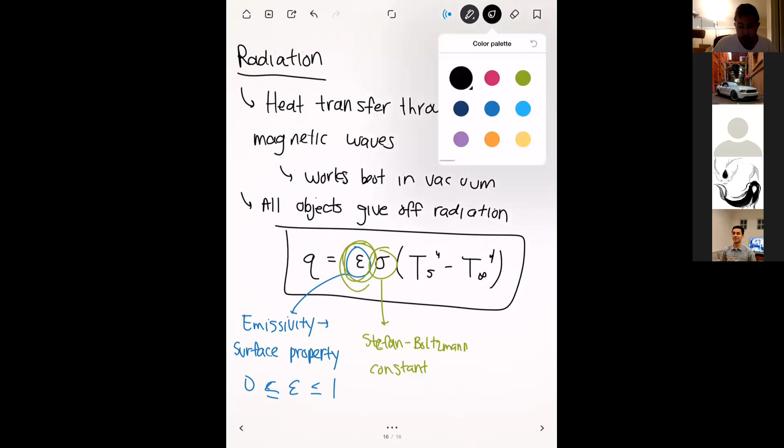There's one more property that I want to go over before we leave for today, and that's this idea of internal heat generation. Thermal generation is a way so that you can generate heat within your Ansys part.

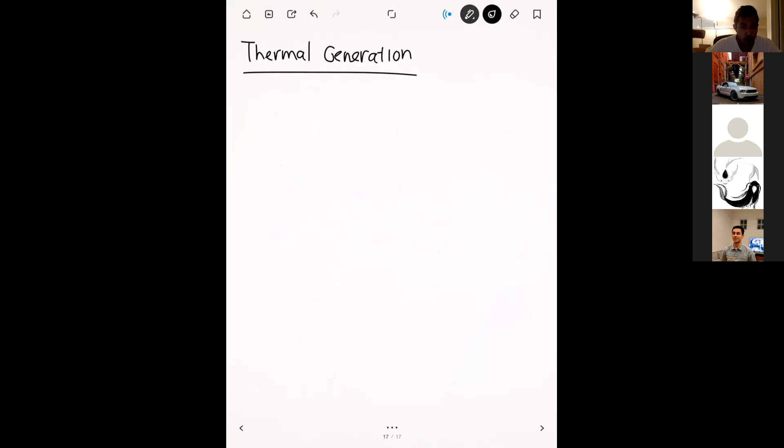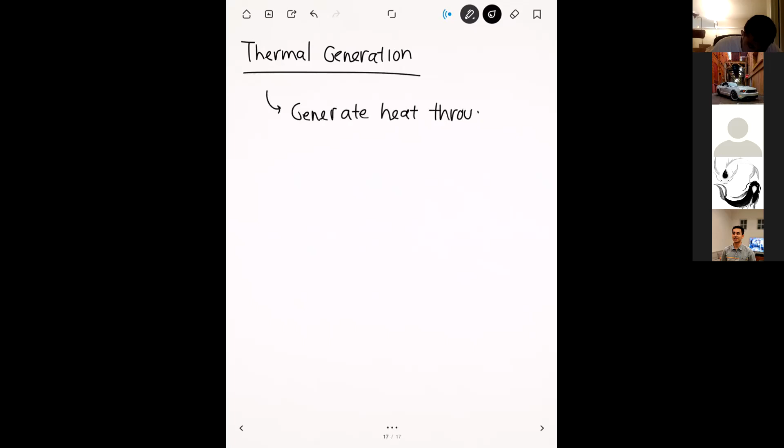If you have some kind of chemical reaction happening within your Ansys part, or maybe electrically it's being heated one way or the other, you can apply internal heat generation through Ansys.

One example of this is, let me go back to our combustion chamber - if you want to do a heat transfer simulation on the air inside that combustion chamber, you can model your combustion reaction as kind of some internal heat generation. As the combustion reaction takes place, it releases that thermal energy, and then you can account for that in your simulation.

In a lot of cases, internal heat generation is not that common, so I'm not going to go too much in depth, just for the sake of brevity. But just know that feature is out there for you to use. So any final questions on this before we wrap up for today?

All right, questions? So if we want to ask you for some help on the final project, when would be a good time to do that?

Anytime. Just send me an email, send me a message on Discord, and then we can either meet in office hours, or we can set up a meeting outside of that to discuss your project.